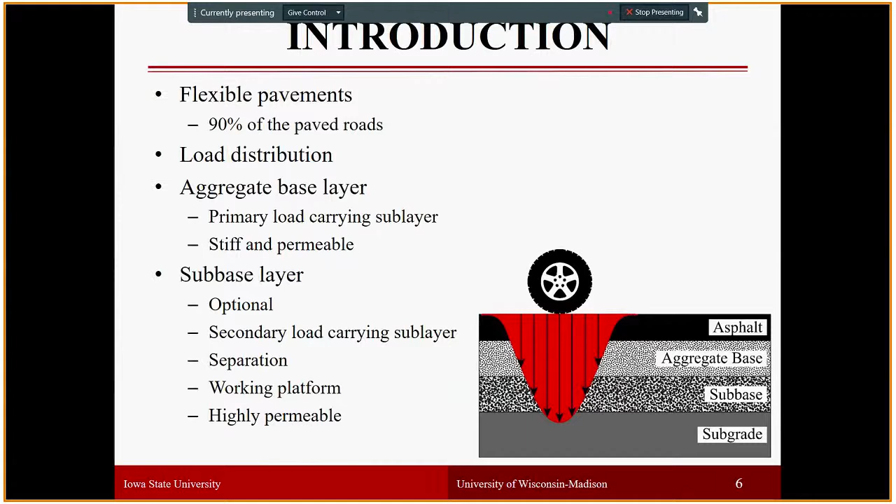One issue with previous sub-base layers was permeability, and it is well known that moisture presence in pavement foundation systems does not help the stiffness of the upper layers. So it is very important that the sub-base layers have good drainability.

For instance, based on the USGS 2018 report, 1.33 billion tons of virgin aggregates are being used, and more than three-quarters of this for roadway construction. So the demand increased, and the presence of low quality aggregates causes an increase in the price of conventional virgin aggregates to be used.

So states are looking for alternative materials. For instance, some of these alternative materials are recycled concrete aggregates, recycled asphalt pavements, but now large stone sub-bases are another alternative material to be used in these bases, most likely sub-base materials.

Large stones have potential to be used for the sub-base layer, especially for their drainability, drainage capacity, and using less intense crushing operations, improving sustainability. The energy consumption decreases significantly, making the material more available and lower in cost.

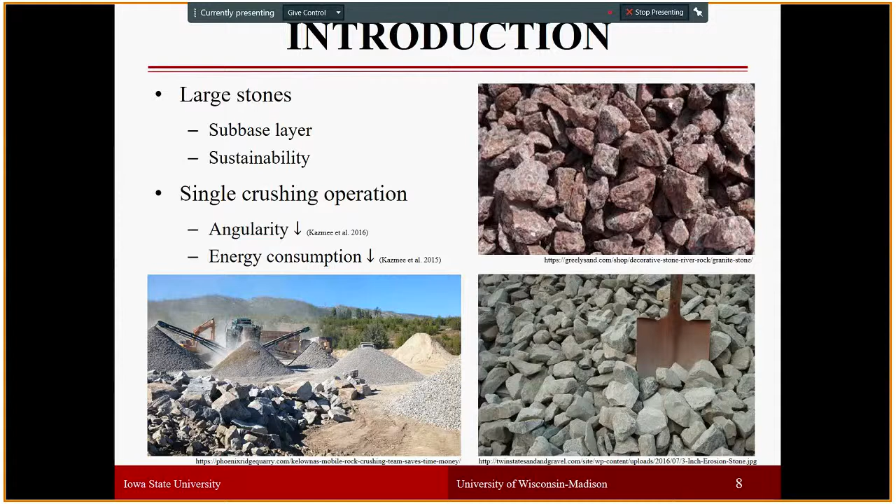One thing is its angularity is decreasing because you don't get the intense crushing process that you have in regular virgin aggregate production or recycled concrete aggregate production. But the lower angularity may contribute to higher permeability on these materials too, which is an advantage.

One of the main drawbacks of large stone sub-base is that there is not enough data that can be followed for design and construction. There are some states mentioning these large stones, and we mention it significantly in our Task 1 literature review report, which is on the MnROAD test data. I have 5 slides at the end of my presentation; if anybody is interested, we can go over them after the presentation is finished.

One limitation is laboratory equipment. One of the first things in any design, DOTs or contractors look for gradation specs and determine the gradation. But for large stone sub-bases this is not as easy as for regular virgin aggregates, because there are large sizes more than 2 or 3 inches in diameter, and there are no sieve shakers in a conventional standard laboratory to do that. Part of this limitation, we are going to try to implement an image analysis technique that can be used very quickly.

Another issue is inconsistent field data and fluctuation of data. One study conducted by Dr. Tutumluer, Kazmee et al. 2016, saw some inconsistency with field data because of large voids and the handling of the material due to its different size. Mobilization of particles is high with these materials; once you put them, compaction is not easy, and we will show pictures. They have large voids, and after you put these large stone sub-bases and the base layer and asphalt layer under traffic, they start reorienting themselves and keep moving.

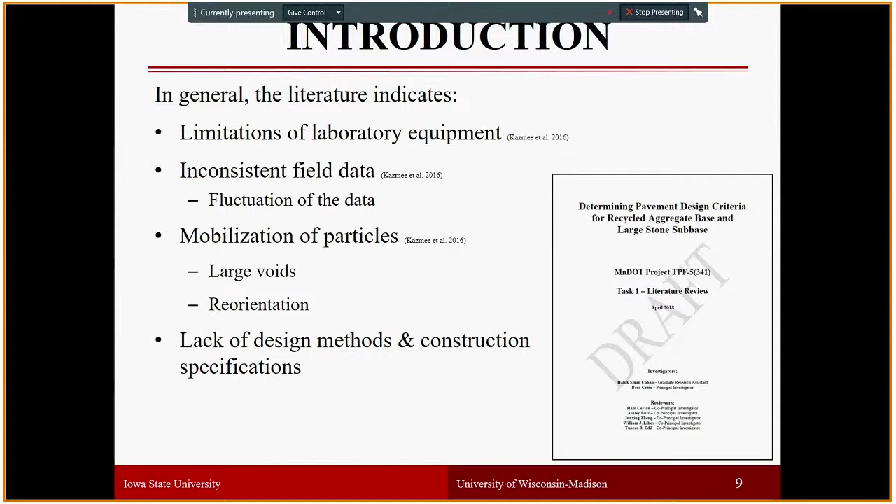As part of our project and ongoing process, the first goal is to determine the field performance, then determine its index properties from the laboratory, especially particle size distribution, sphericity, angularity, and surface texture of these materials, which are very important. The third goal is to try to come up with a design spec for this particular large stone sub-base.

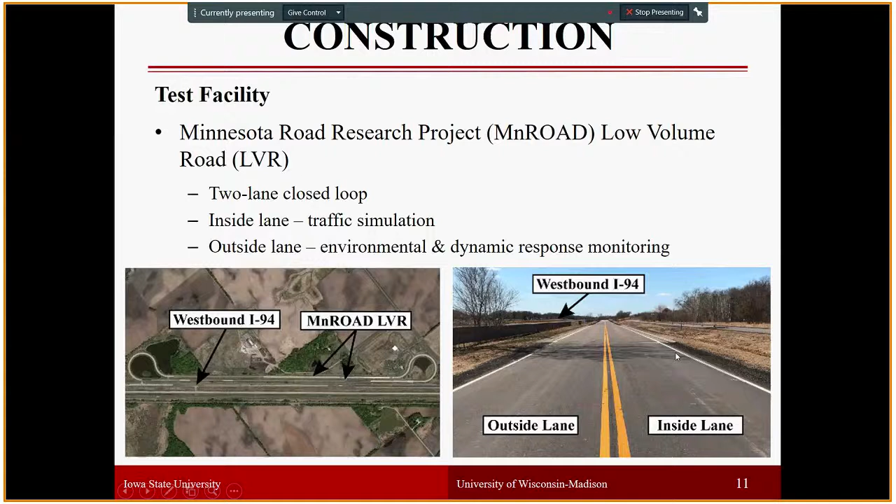We have 6 different test sections, 7 different test sections built with large stone subbases in MnROAD, a low volume road test section. It's a 2-lane closed loop, and we are having readings from the outside lane and inside lane of these test sections. Currently the test sections we have, like I said, are 7 different test cells built with large stone subbases.

The first 2 test cells here are built on a clay loam subgrade, and the large stone subbase is built with 18 inches thick material.

Then we have 4 cells built with 9 inches thick large stone subbases, with a triaxial geogrid, triaxial geogrid with geotextile, another section built with large stone between the subbase and clay loam using biaxial geogrid and geotextile, and another just with biaxial geogrid. There is one cell, 728, that only has 9-inch large stone subbase over clay loam.

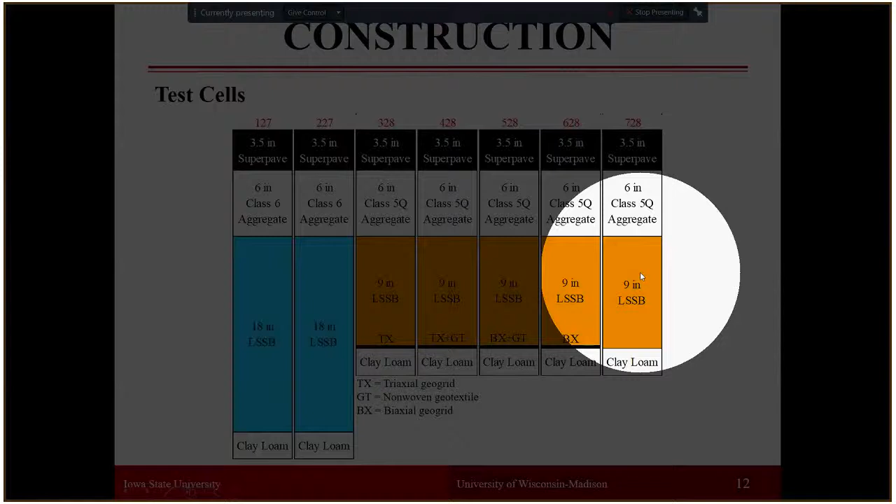The reason this test section was left as-is, based on the construction report, is that there are too many utilities in this part, so it was not easy to reconstruct this test field.

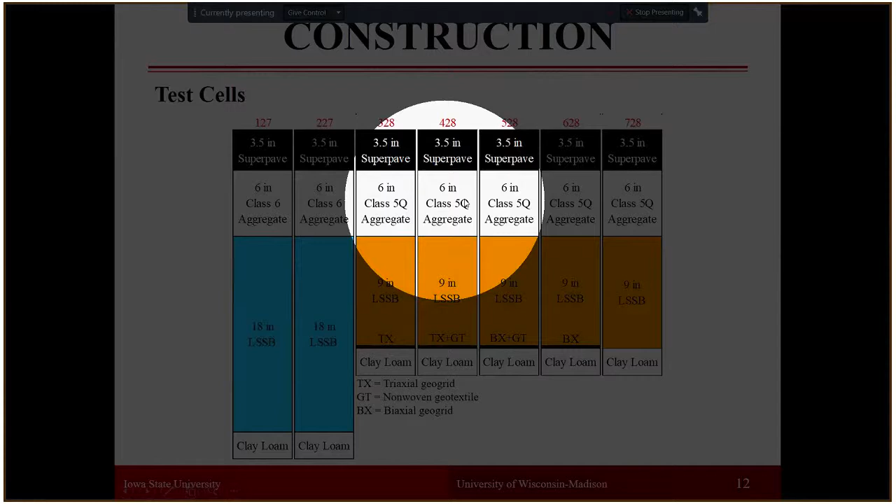One thing that is different is that the test sections with 18-inch thick large stone subbases have a class 6 aggregate on top as a base layer, while the other large stone subbases use class 5Q aggregate material as the base layer. All of them have 3.5 inches thick asphalt layers on top.

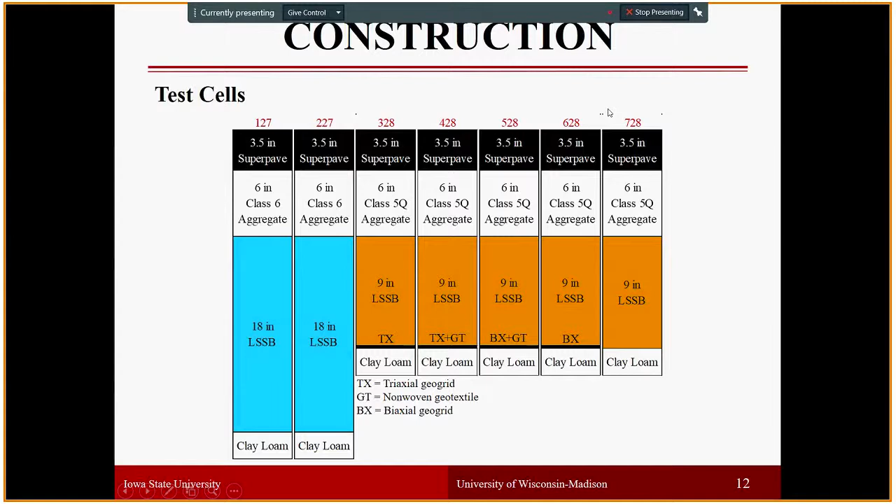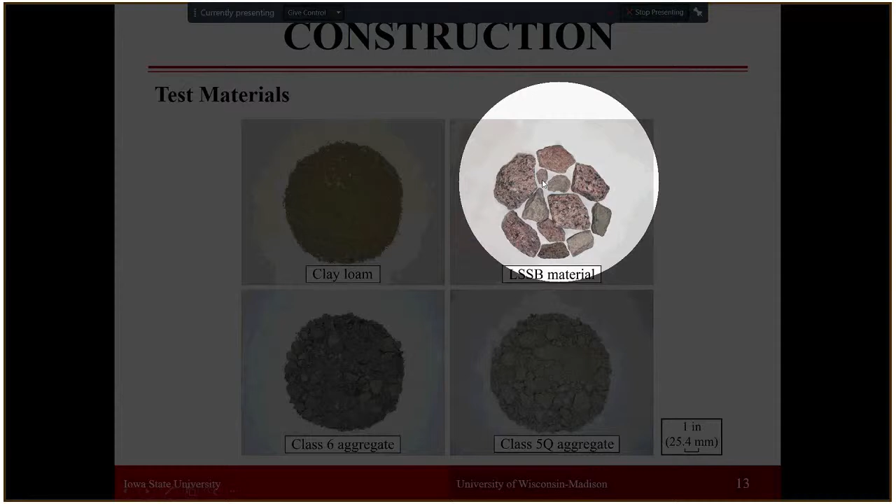Today's talk will mainly focus on the large stone subbase aggregates that we use. As you can see here, we put a scale for 1 inch, and the large stone subbase aggregates are predominantly much larger than 2 to 3 inches in size overall.

During construction of the 18-inch large stone subbase layers, and actually all large stone subbase layers, there was non-traditional subgrade preparation. The subgrade was weakened in the beginning to a value where the DCP index should be between 2.5 and 3.5 inches per blow. It was loosened and watered to prepare the subgrade.

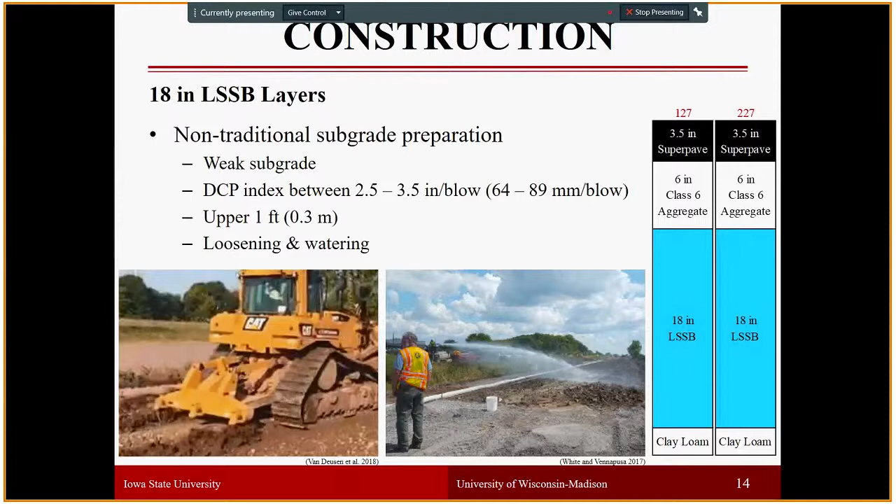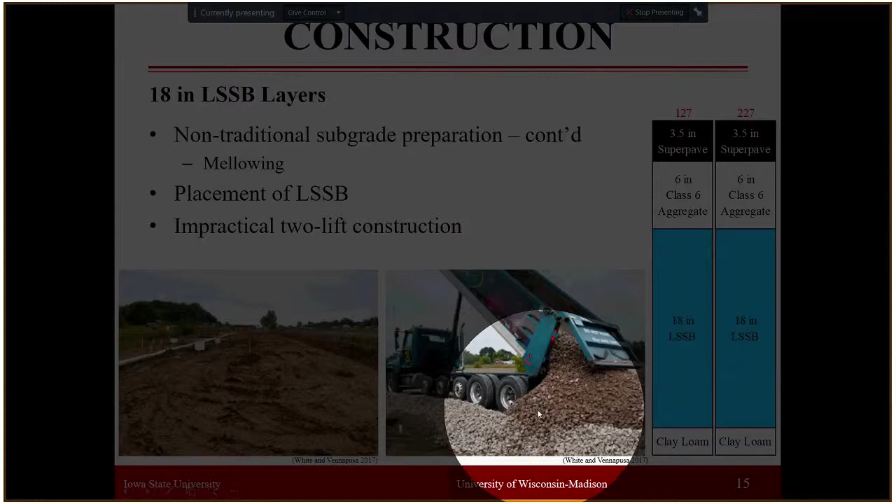Here again, the idea was—and this is why we have 2 identical test sections—one of these test sections was originally thought to be built in 2 layers instead of one thick 18-inch large stone subbase layer. But due to construction issues, constructability of these layers in 2 lifts was not really easy or feasible, so we ended up with 2 identical test sections, one next to the other.

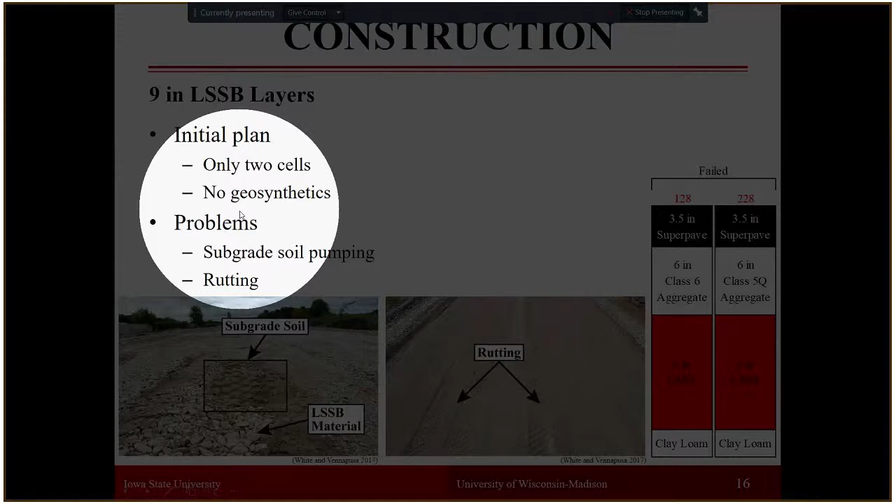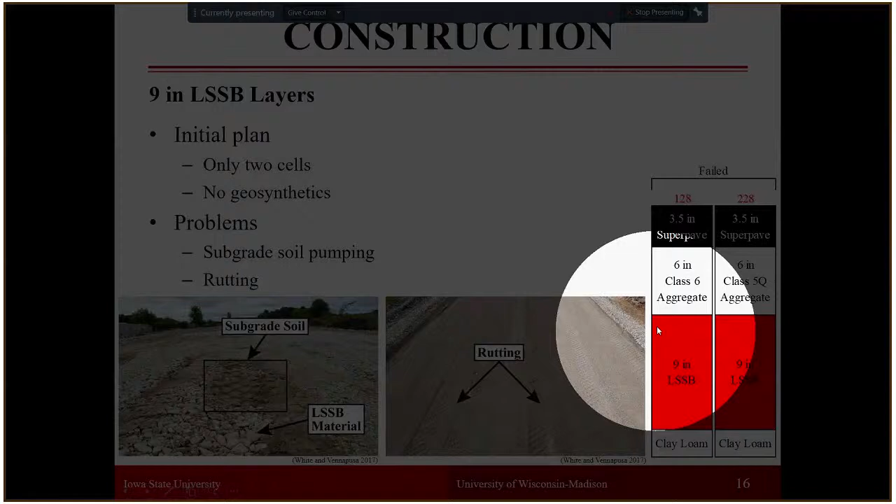During construction of the 9-inch thick large stone subbase materials, the initial plan was to only have 2 cells with no geosynthetics, so we could compare the 9-inch large stone subbase layers with cells built using different aggregate materials, and also compare these 9-inch thick materials directly with the 18-inch thick large stone subbase materials. However, there were significant problems with the subgrade.

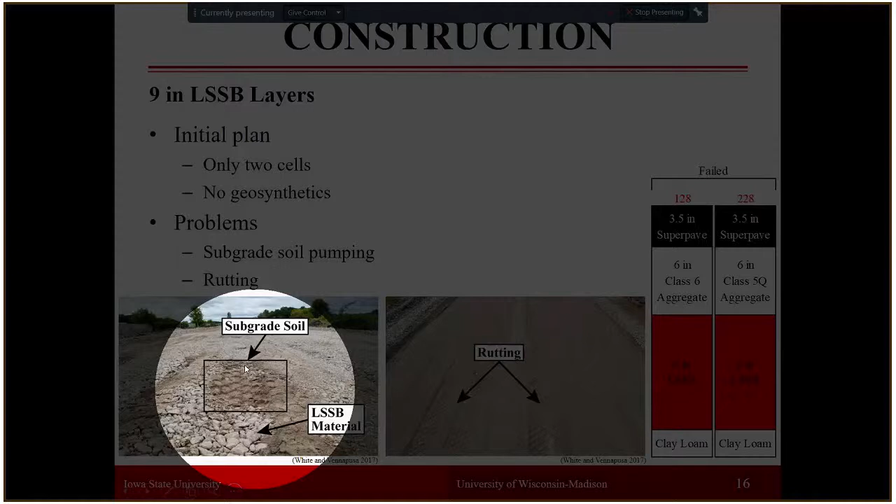One of the problems was subgrade soil pumping. Once the large stone subbase was put on the subgrade, the subgrade soil started being pumped, moving toward gaps and voids through the large stone subbase to the surface. After putting the base layer on top, significant rutting failures happened during construction with the equipment.

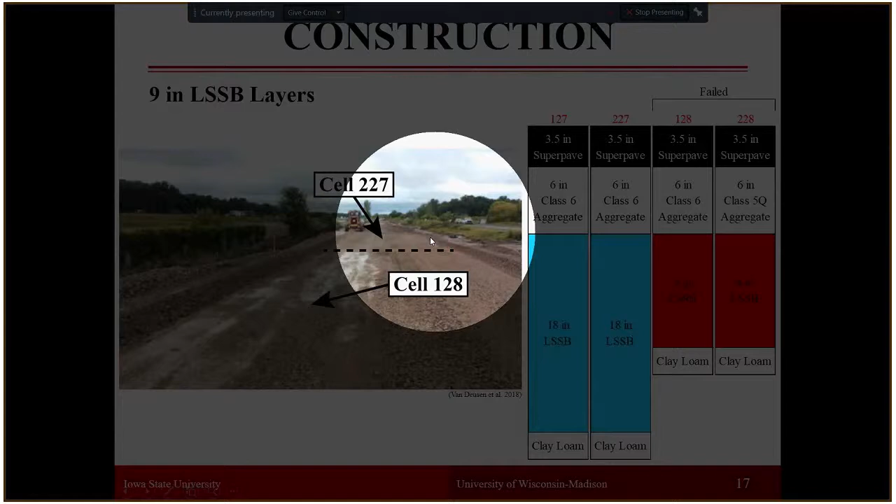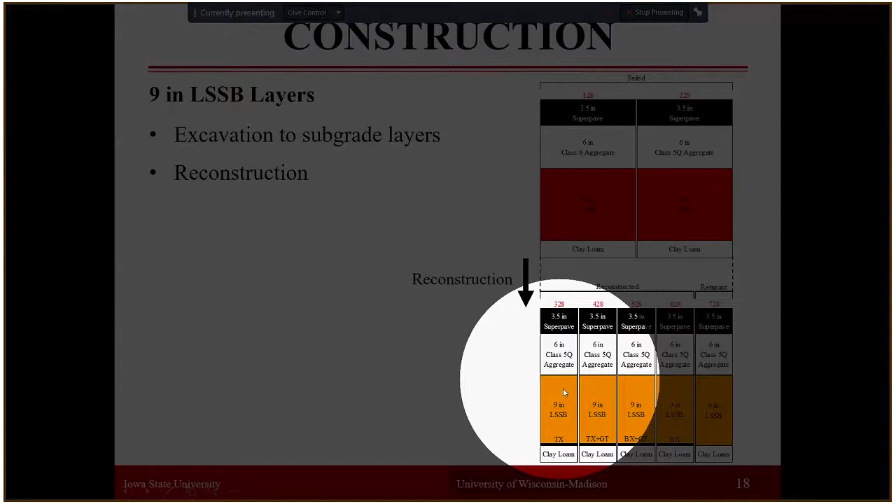So all sections were rebuilt, and this time geosynthetics were placed between the subgrade and the large stone subbase layers for these 4 test sections that have 9-inch thick large stone subbases.

To repeat, the reconstructed test section has 9-inch large stone subbases. The first cell had triaxial geogrid, then a combination of triaxial geogrid and geotextile, biaxial geogrid and geotextile, and biaxial geogrid alone, all placed between the 9-inch thick large stone subbase and the clay loam.

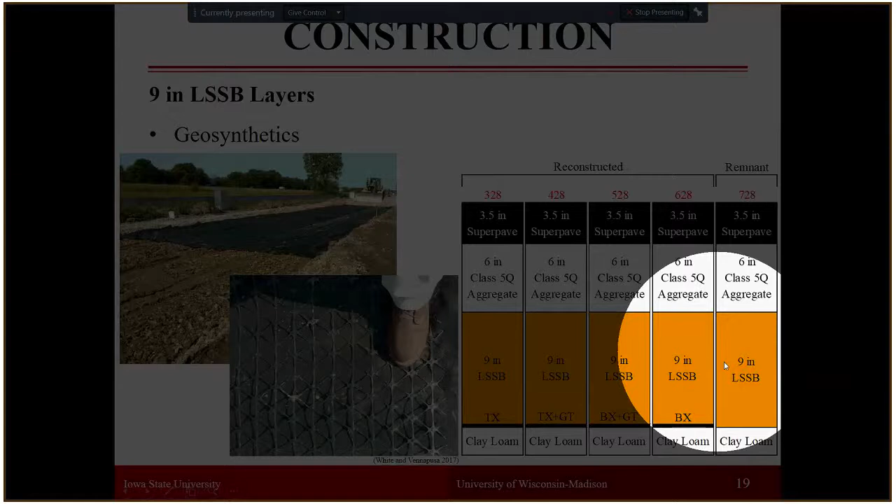We have this last test section, which we decided to use as a control section with no geosynthetics.

In terms of field testing, we have conducted dynamic cone penetrometer tests, MnROAD-conducted DCP, lightweight deflectometer tests, intelligent compaction tests, and falling weight deflectometer tests.

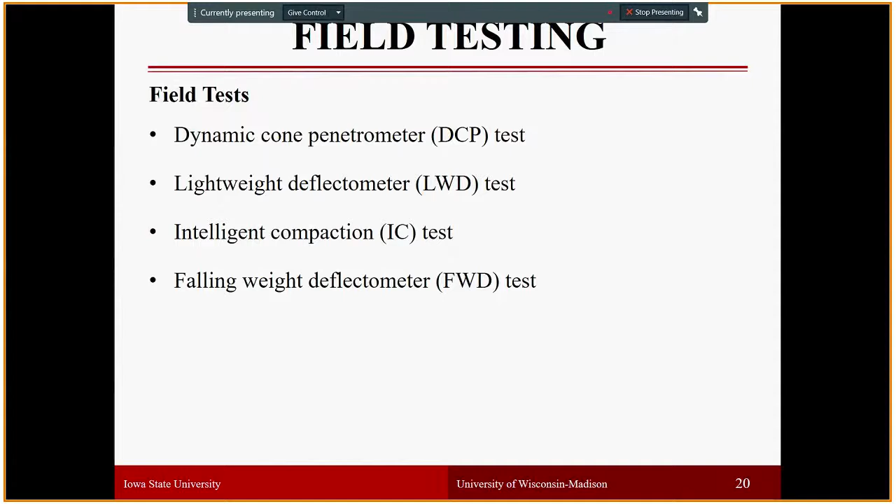In terms of the dynamic cone penetrometer test, on the y-axis we have the DCP index in inches per blow, and on the other axis we have SI units. The blue solid symbols represent the DCP of the subgrade layers. The idea when weakening and loosening the subgrade soil was to make sure these 3 inches per blow DCP index were satisfied before the test sections were built.

The red line and red boxes show the DCP of the base layer after it is built, and as you can see, it has a stronger, lower DCP index than the subgrade layers. From here we can observe that, in terms of strength, the thicker large stone subbase test sections have a lower DCP index, indicating they are slightly stronger than the other test sections built with 9-inch large stone subbase with geosynthetics.

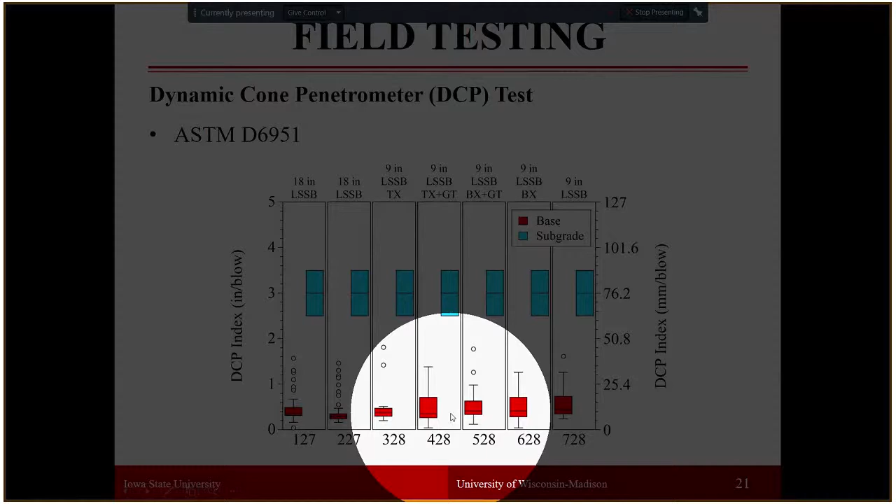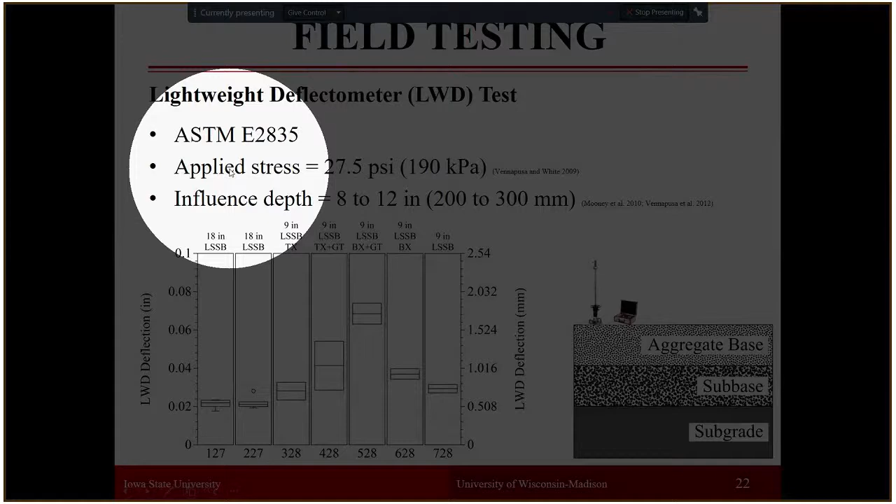For the lightweight deflectometer test, we followed ASTM E2835, and the applied stress was 190 kilopascal. It should be kept in mind that the influence depth of the LWD is 8 to 12 inches. These tests are conducted on the aggregate base layer.

What the LWD does is give the composite modulus of the entire pavement foundation system. Looking at the entire system, the test sections built with 18-inch large stone subbase had 0.02 inches of deflection, while the test sections built with 9-inch large stone subbase with geosynthetics had higher deflections. As a result, they ended up having lower composite modulus values.

One thing we wanted to point out is that the subgrade conditions for these 9-inch thick large stone subbases, even though they were the same subgrade, the conditions did not seem to be the same as the subgrade under the 18-inch large stone subbases. So we have sensor data installed in this test section and we're collecting that data. We're not there yet, but we will also look into the moisture values of this subgrade and other characteristics later on to check what is going on with the subgrade itself.

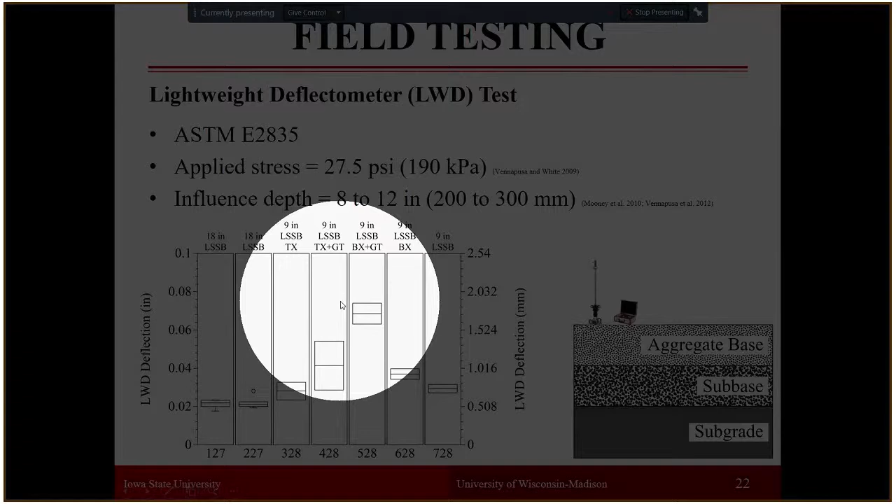However, even though we don't see the contribution of the geosynthetics per the LWD test results, during construction, based on observations, the geosynthetics definitely helped, and rutting did not occur after test sections built with geosynthetics on the base layer. So it contributes, but the range of the LWD test is not really enough to quantify the contribution of the geotextiles on the system. This was one of the field limitations in measuring the geosynthetics' contribution in the field, and I have a few more slides describing this in more detail.

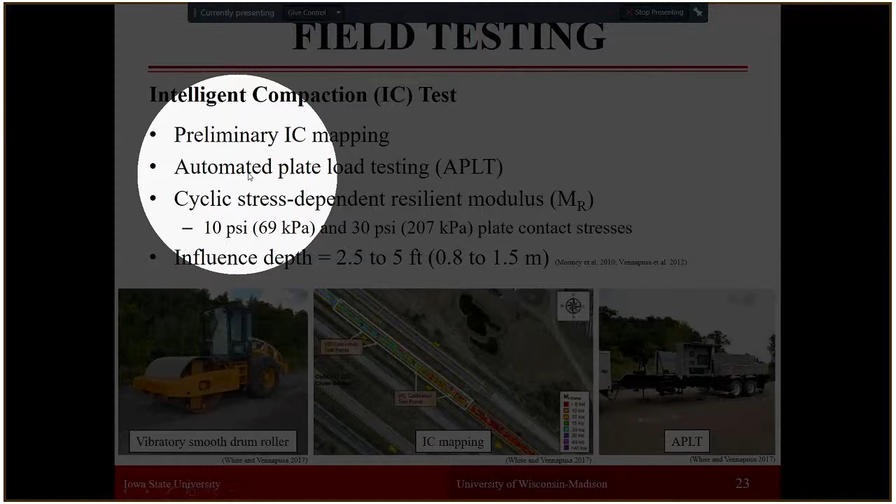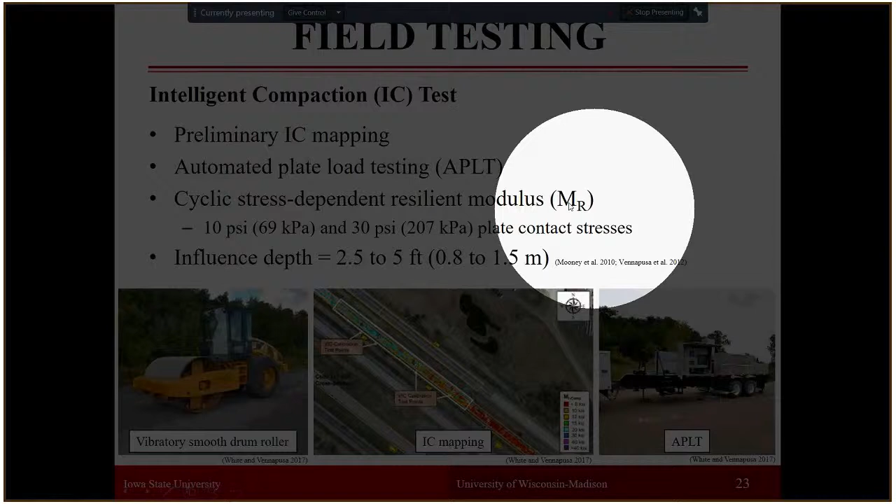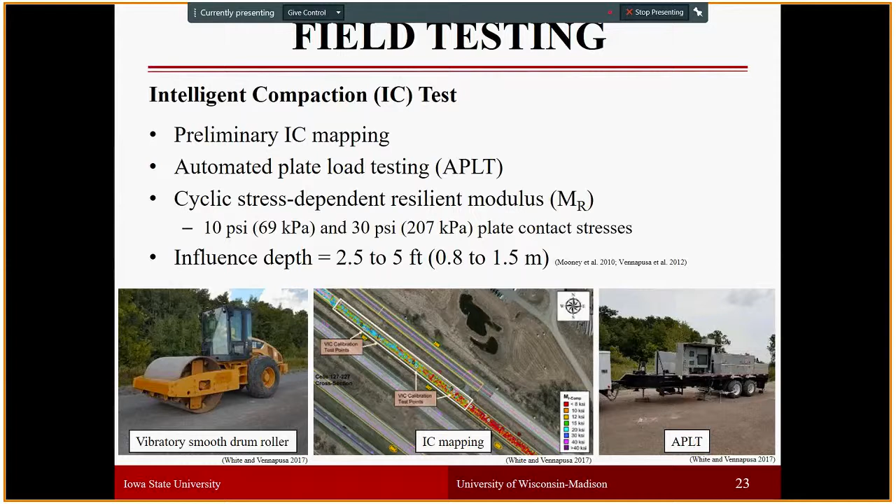Intelligent compaction tests were also conducted, and here is the preliminary IC mapping conducted by Ingios Geotechnics. Automated plate load testing was also conducted under different stress-dependent conditions to determine the resilient modulus from the field tests. These tests were conducted at two different plate contact stresses. The influence depth of the APLT test is higher than the LWD for composite layer analysis, so we hope these results may provide better information about these large stone subbases.

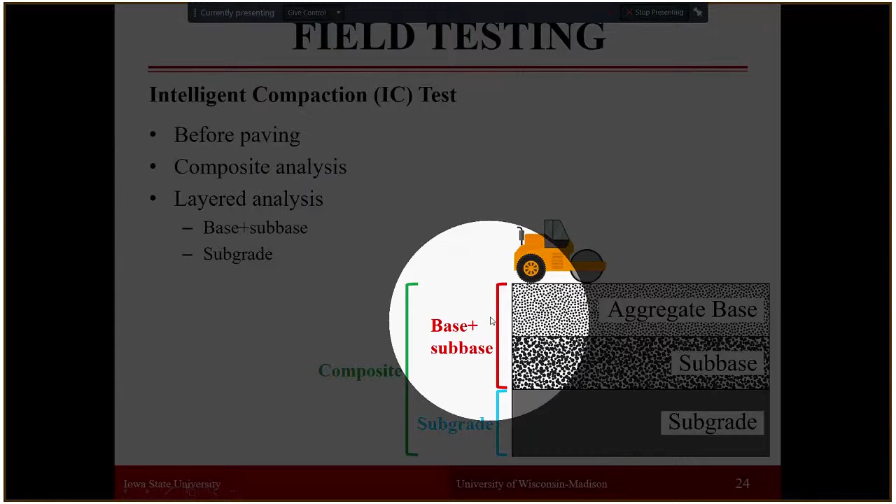All intelligent compaction tests were conducted before paving. We conducted both composite analysis, looking into the resilient modulus values of the entire pavement system, as well as only layered systems of base and subbase, and only the subgrade layer analysis from these tests.

Then we look at the base-subbase stiffness from the large stone subbases. The 18-inch thickness test sections have relatively higher resilient modulus values than the rest of the test sections built with geosynthetics. However, another thing we see, exactly what Kazmi et al. 2016 and the University of Illinois, Dr. Tutumluer, experienced, is a fluctuation in the performance of these large stone subbase test sections.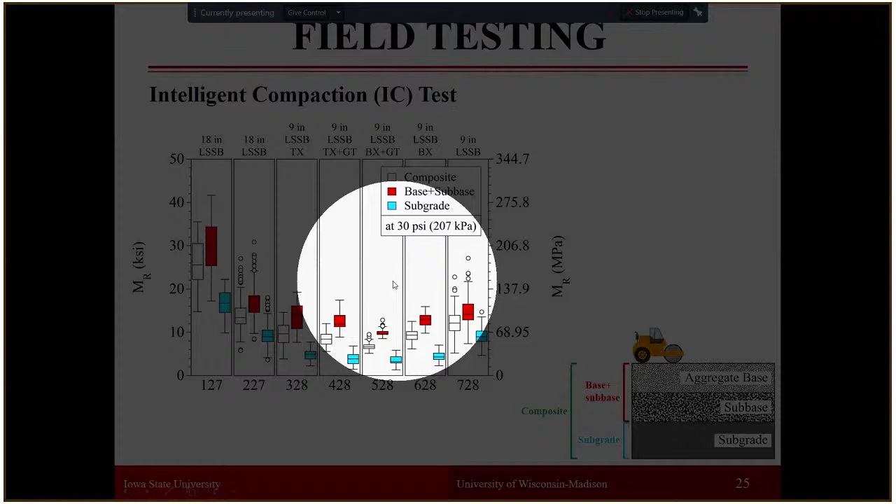In terms of geosynthetics, the triaxial geotextile and triaxial geogrid built 9-inch large stone subbases seem to have slightly higher stiffness and resilient modulus values than the ones built with biaxial geotextile and biaxial geogrid, indicating that triaxial geogrids seem to have a slight advantage over the biaxial geogrid plus geotextile test system.

We also had MnROAD conduct falling weight deflectometer tests, and this is a picture and schematic diagram of the FWD test equipment.

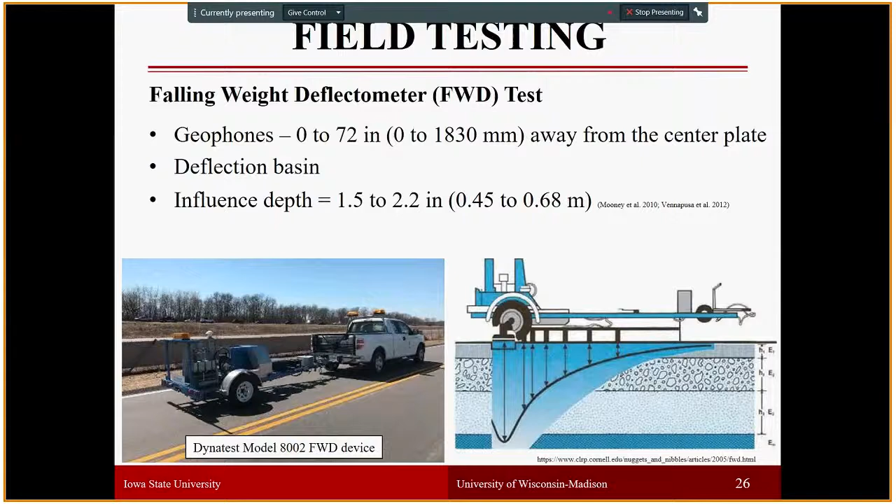Again, we used the influence depth of FWDs at this range, which is on almost the top surface of the base layer of these test sections. We look at the deflection basin using all 9 geophones to do layered analysis to predict the stiffness of subgrade, subbase, and base layers. We also look into the composite analysis of the composite elastic modulus of the entire test section using the FWD test.

But in this case, we only use the sensors and measurements at the center, at the load plate.

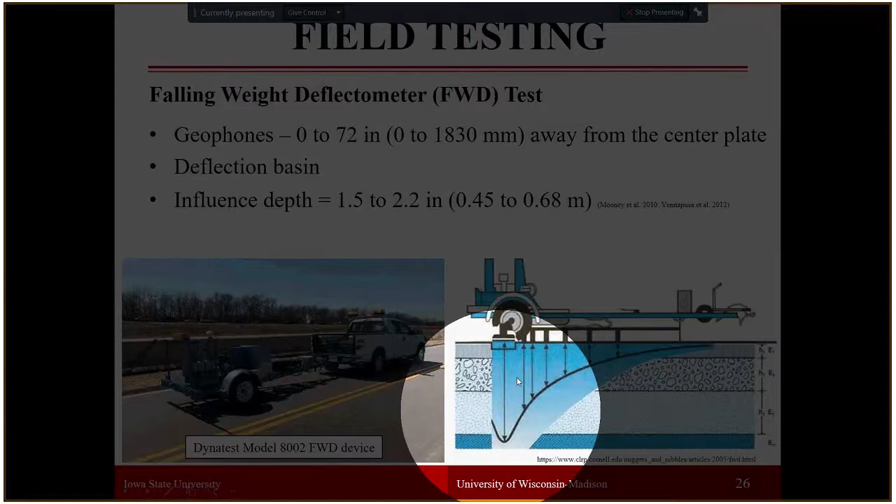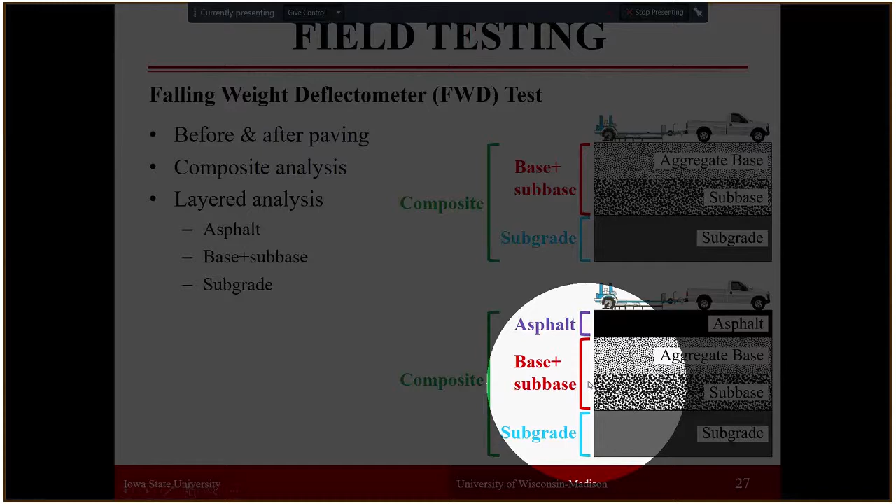Again, we did the FWD analysis before and after paving, with base, subbase, and subgrade layered analysis, and composite analysis. We also analyzed the FWD right after paving and did the asphalt layered analysis, determining base, subbase, and subgrade, plus composite analysis again.

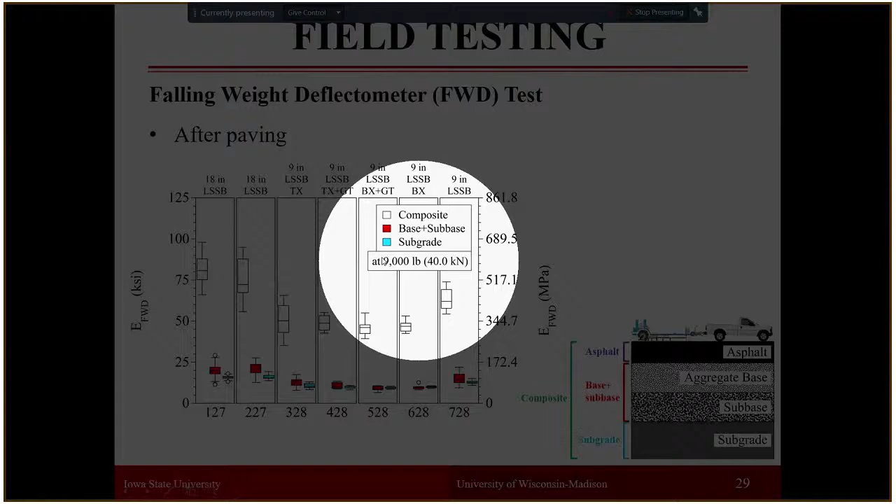But the FWD results are consistent in trend with the intelligent compaction and APLT test results, indicating that our analysis is valid. After paving, we did the same analysis, and again subgrade stiffnesses are lower, as expected, than the base, subbase, and asphalt materials themselves.

And from the composite analysis itself, again the trend is the same after paving: the 18-inch large stone subbase had higher elastic modulus than those built with 9-inch large stone subbase with geosynthetics.

With the composite analysis, we calculated the elastic modulus of the entire system as one whole. Again, 18-inch large stone subbases performed better, and the 9-inch large stone subbase test sections built with geosynthetics had lower elastic modulus compared to the 18-inch large stone subbases. It seems triaxial geogrids have, on average, slightly higher elastic modulus.

This higher elastic modulus occurs when it is paved, showing that triaxial geogrids may have some advantages over other geosynthetic systems based on these results.

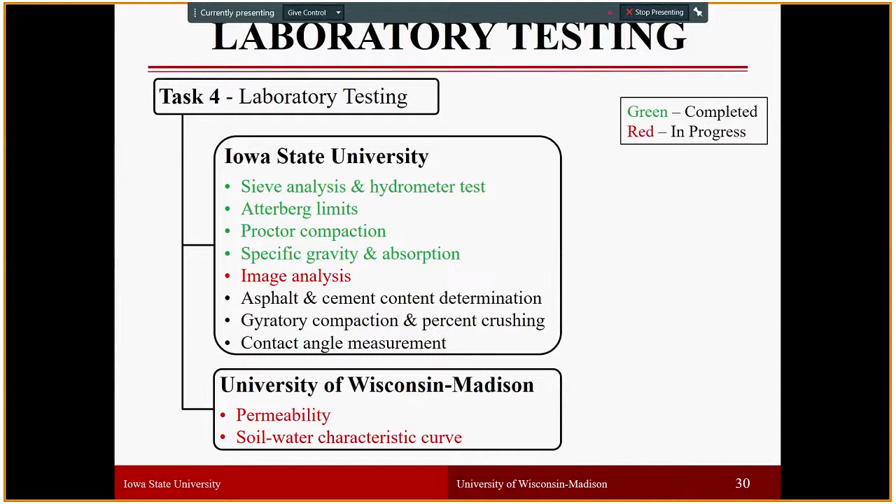Currently we are working on laboratory testing of these materials. We have sieve analysis for the base layers used over these large stone subbases: class 6 aggregates and class 5Q aggregates. We also did it for the clay loam material, and as you can see, the subgrade has very high fines content.

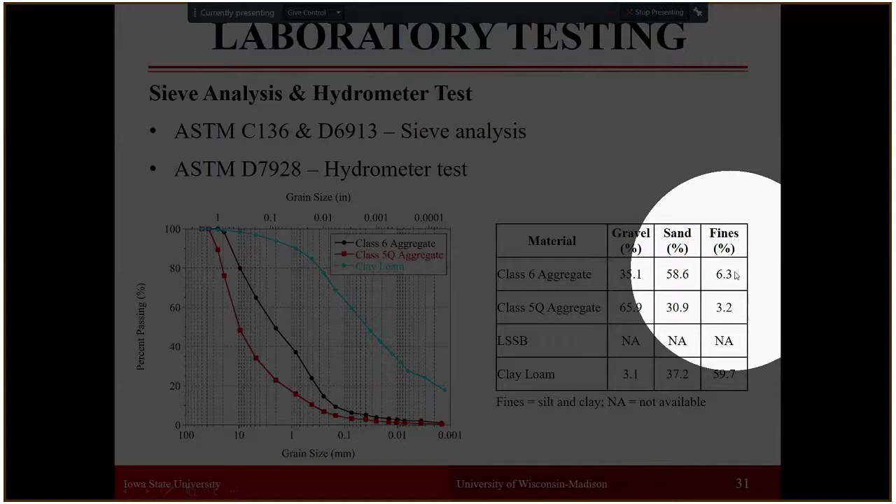On the other hand, the fines content of the class 6 aggregate and class 5Q aggregates are 6.3 and 3.2 percent respectively. For large stone subbase, we are doing extensive imaging analysis, and hopefully by end of April we will have the gradation of large stone subbases.

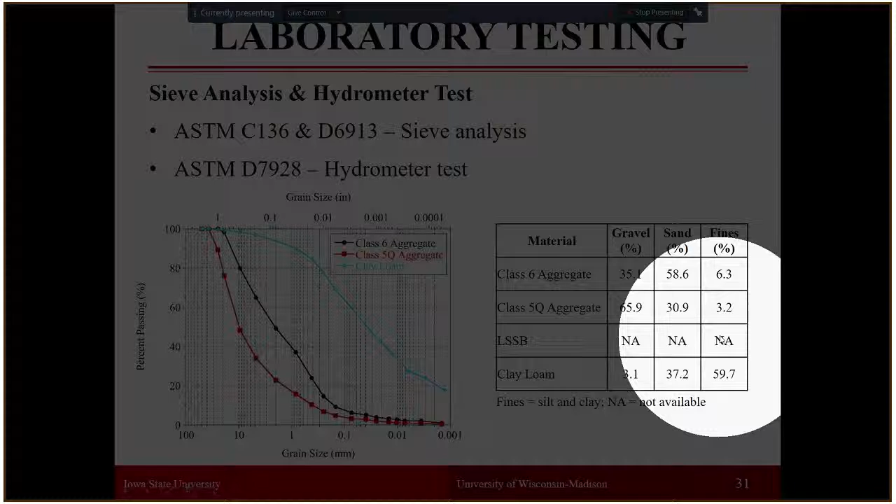Like I mentioned in the first introduction slide, large stone subbase gradation determination is a challenge, a limitation. Hopefully with this tool we're developing, that limitation will be overcome.

Some Atterberg limits tests were conducted for these materials. The liquid limit of the class 6 aggregate was 27.4, but no plastic limit was determined. The class 6 and class 5 base materials were A1A materials, while class 6 was poorly graded sand with silt and gravel.

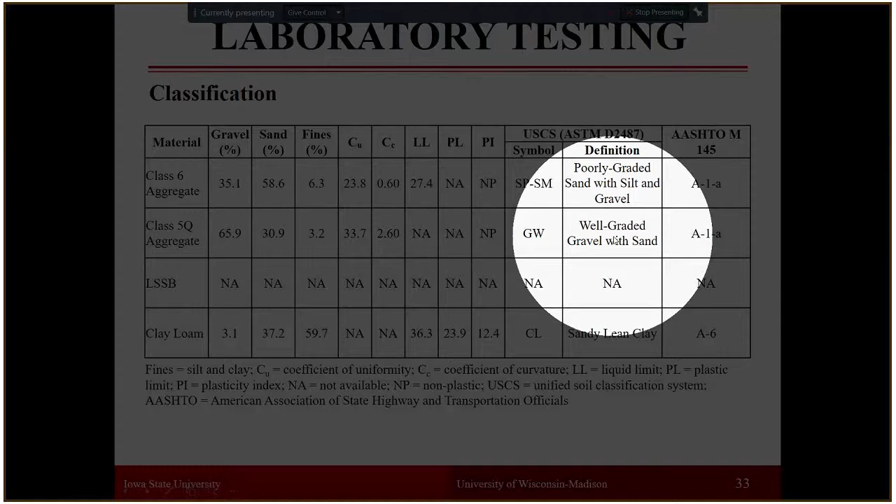Class 5Q was well-graded gravel with sand. A1A, based on AASHTO classification, makes it very good, high-quality aggregate material to be used in such analysis and design.

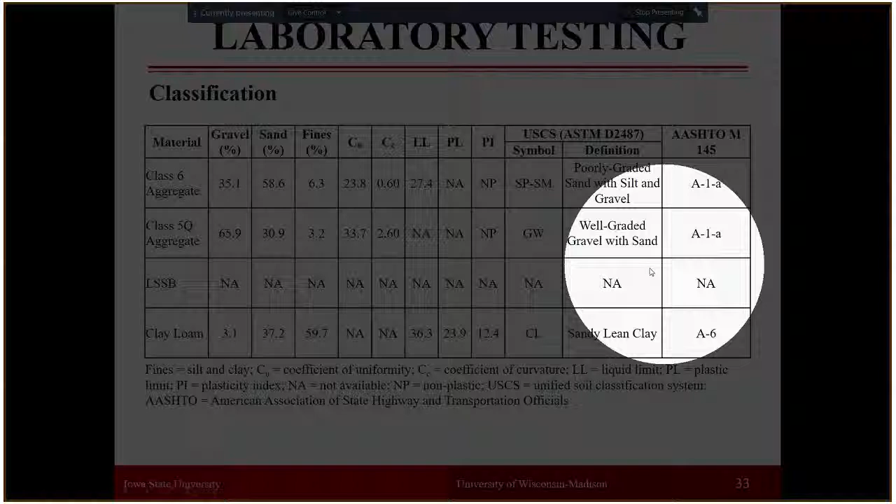The clay soil under these large stone subbases was low plasticity clay, classified as sandy lean clay, an A6 subgrade material. Again, data is not available yet for large stone subbase; we are working on this.

Of course, we likely won't have any Atterberg limits or plasticity data for these materials. Hopefully, by end of April, we will have gravel, sand, fines, and coefficient values, along with the classification of these large stone subbases.

Specific gravity and absorption of these materials were also tested; for the large stone subbase, we can only look at the coarse specific gravity and absorption. In terms of specific gravity, the large stone subbase specific gravity is higher than that of the class 6 and class 5 aggregates, indicating it's a heavier material.

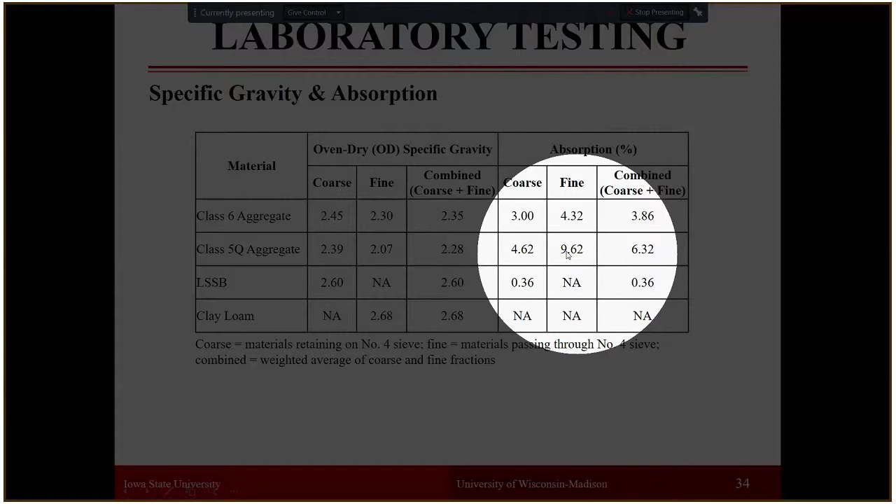In terms of absorption, the absorption characteristics of these large stone subbases are much lower than those of the regular conventional class 6 and class 5Q aggregate materials, as you can see in this table.

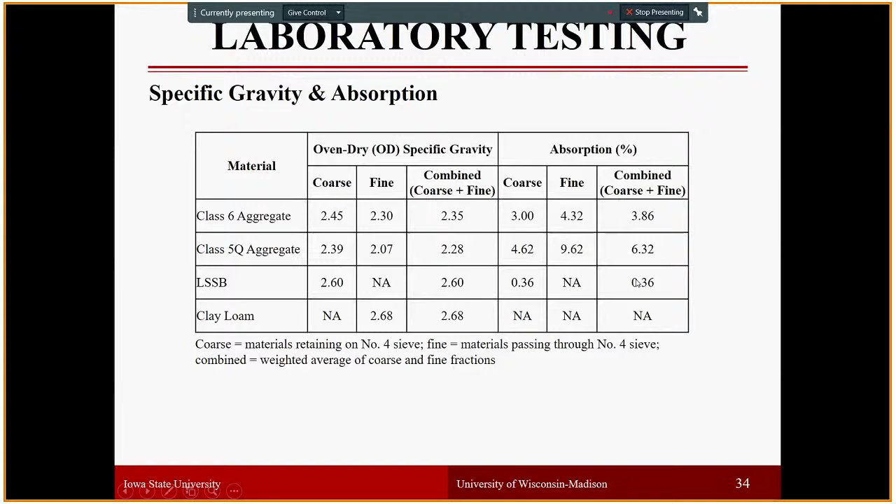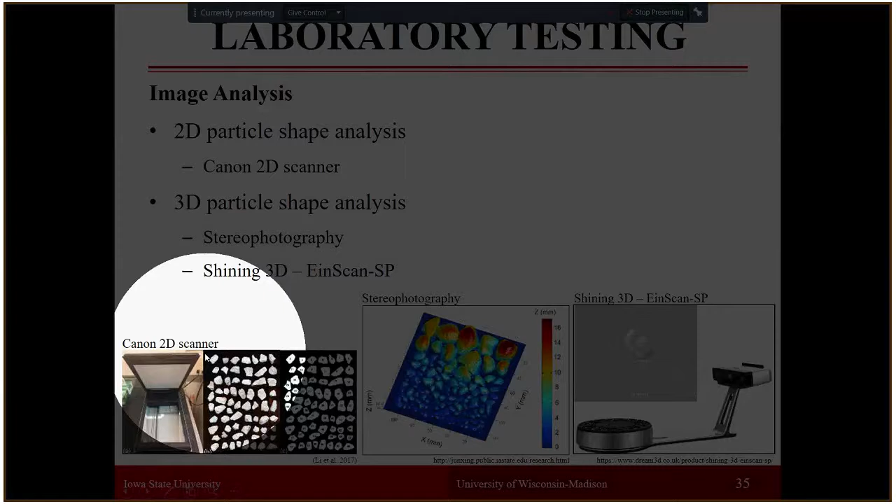Currently we are working on image analysis, doing a 2D scanner, which many Iowa DOTs have access to, and we're doing a 3D particle shape analysis. We're trying to come up with a stereophotography tool - by taking just 2D pictures, you can predict the 3D dimensions of these materials. We will validate this stereophotography analysis with our 3D scanner scanned parameters.

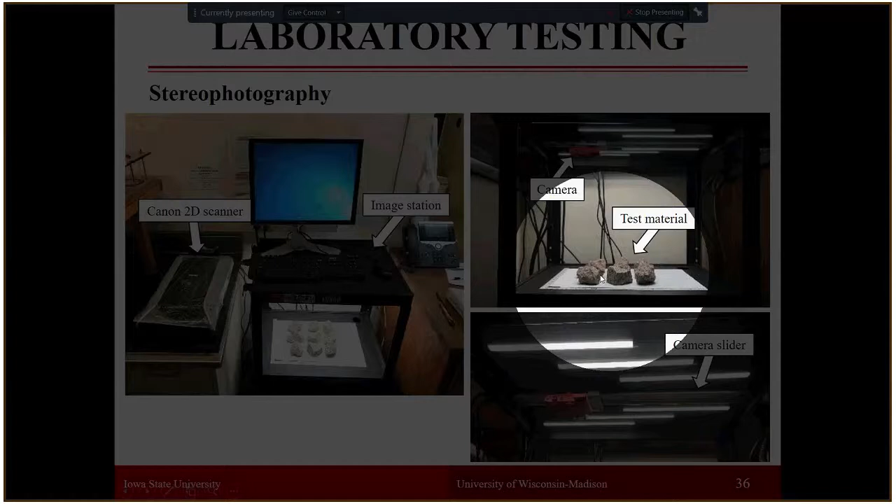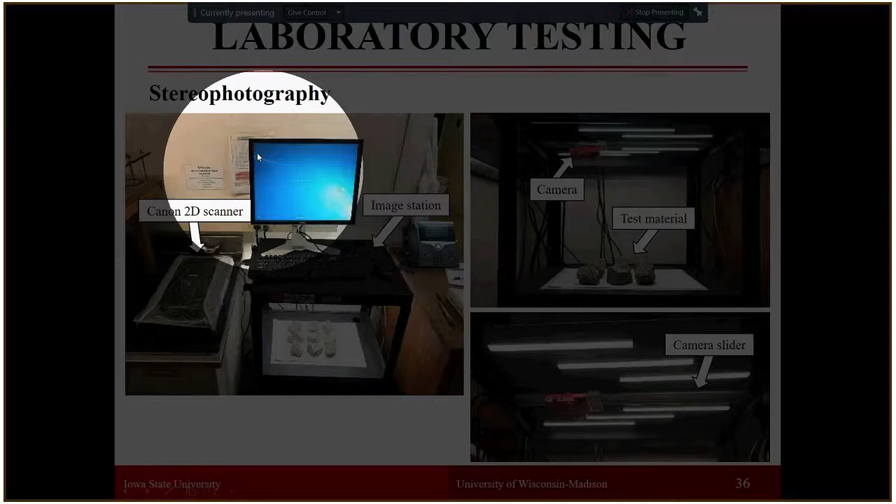This is the stereophotography station that we developed and built. We have a camera on top here, and we put the large stone aggregate subbase materials down here, and our camera slides. For stereophotography analysis, you need to take the same picture of the same material in at least two different positions so you can create that 3D model. In our analysis, we take pictures at the left edge, the right edge, and the center, so we get a more reliable stereophotography analysis.

To validate this stereophotography, we take representative samples and do 3D scanning through the EinScan scanner. Then we validate our stereophotography tool, and use that by just taking a picture of the material to determine the aggregate sizes.

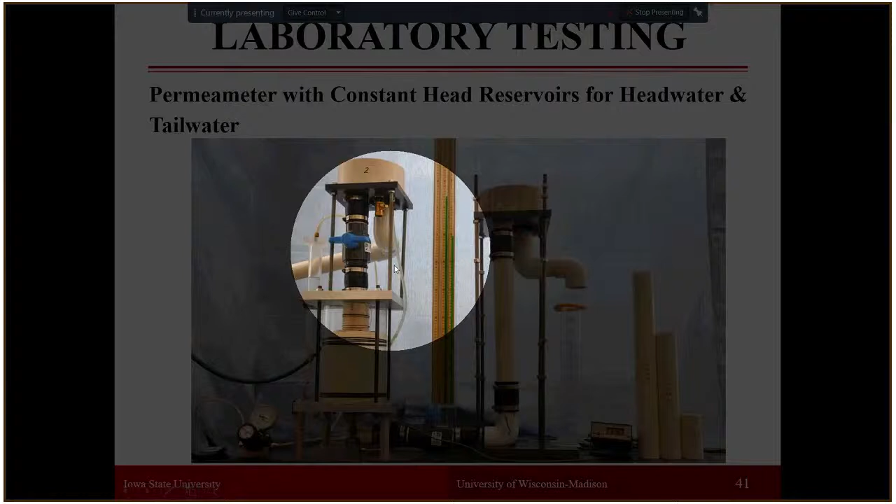This is a typical permeameter with constant head reservoirs for head water and tail water, used for aggregate base materials. This is not applicable for limestone subbases, and Wisconsin will conduct the permeability test on the limestone subbases after we are done with our image analysis and all that.

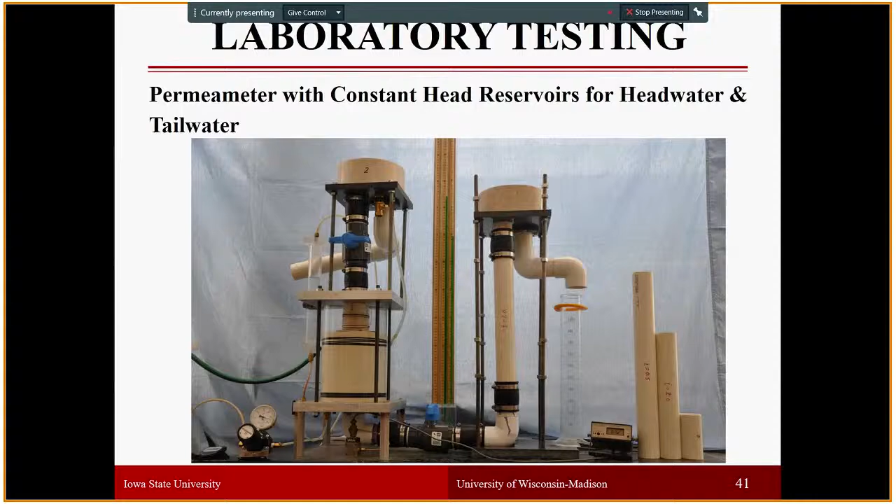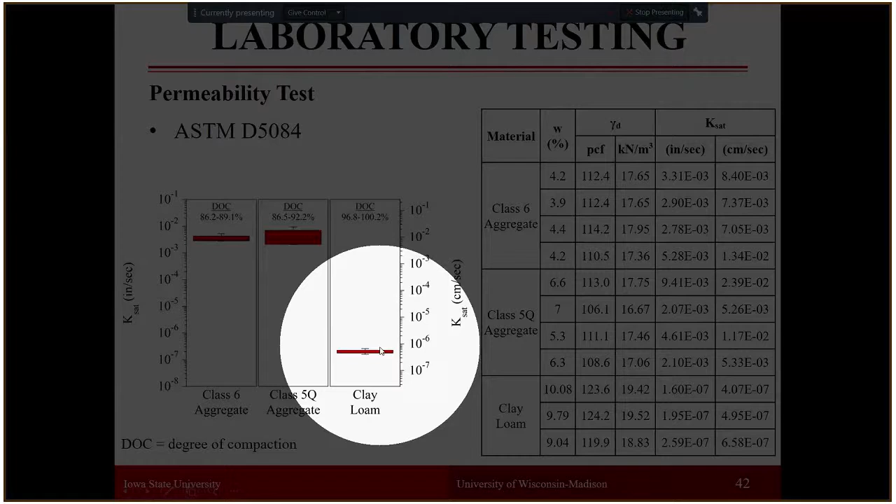These results show the hydraulic conductivity conducted on the base layers, Class 6 and Class 5Q materials, and the clay loam material at certain density and moisture content values. On average, the hydraulic conductivity permeability of the Class 6 and Class 5Q aggregate bases is between 10 to the minus 2 and 10 to the minus 3 centimeters per second, while clay loam hydraulic conductivity is close to or lower than 10 to the minus 6 centimeters per second, which is expected.

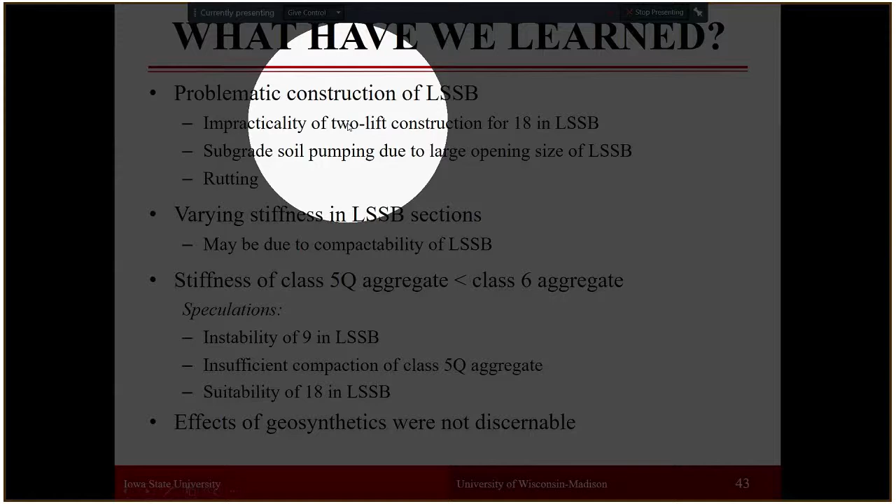So what we have learned so far from our research on the limestone subbases: during construction, there was impracticality of two-lift construction for 18-inch limestone subbases - it was just not feasible. Subgrade soil pumping due to the large opening size of limestone subbases was observed, and once you put the base layer on, rutting occurred. These were the problems.

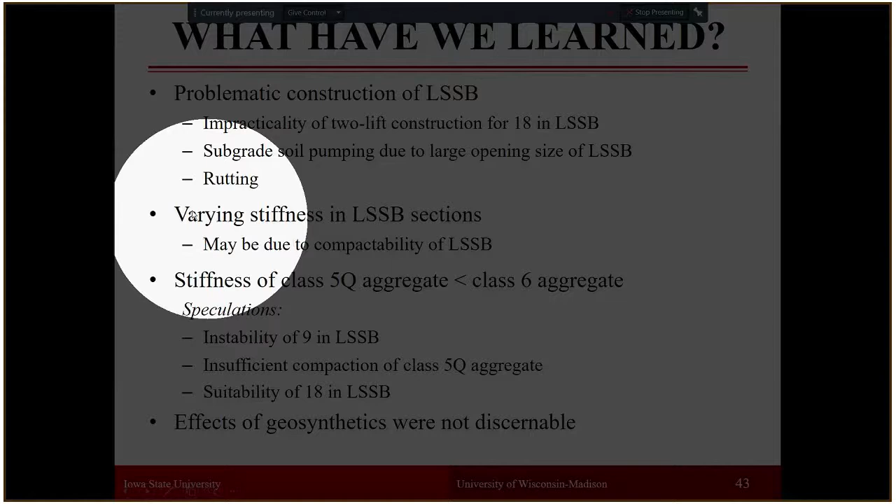For instance, with the 9-inch thick limestone subbases, these two issues were overcome by putting in geosynthetics. However, one challenge with this is that quantifying the contribution of the geosynthetics in terms of stiffness and strength gain was not feasible.

The reason for this is that current test methodologies - LWD, or APLT automated plate load test, or falling weight deflectometer test - the load put on the test sections is not really enough for geosynthetics to start showing their contribution. So different test methodologies, maybe heavyweight deflectometer test methodology that is usually used for airport pavements, may be used to quantify the impacts of geosynthetics on the stiffness and strength of these test sections.

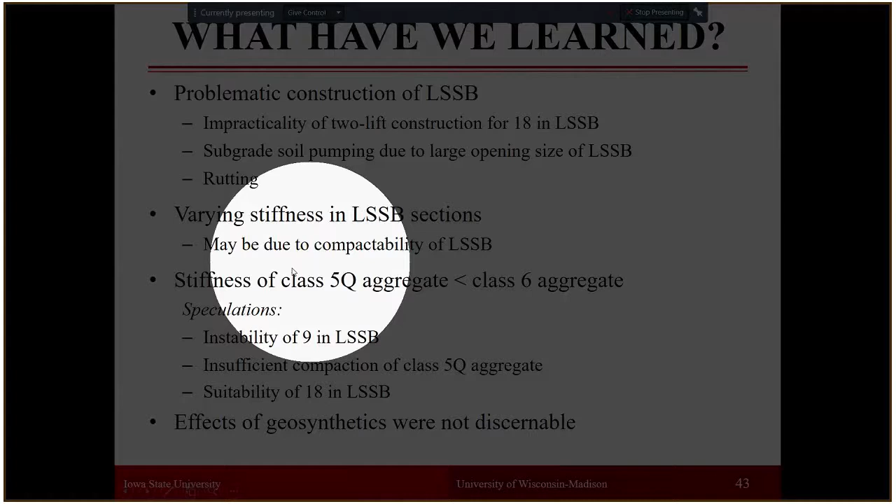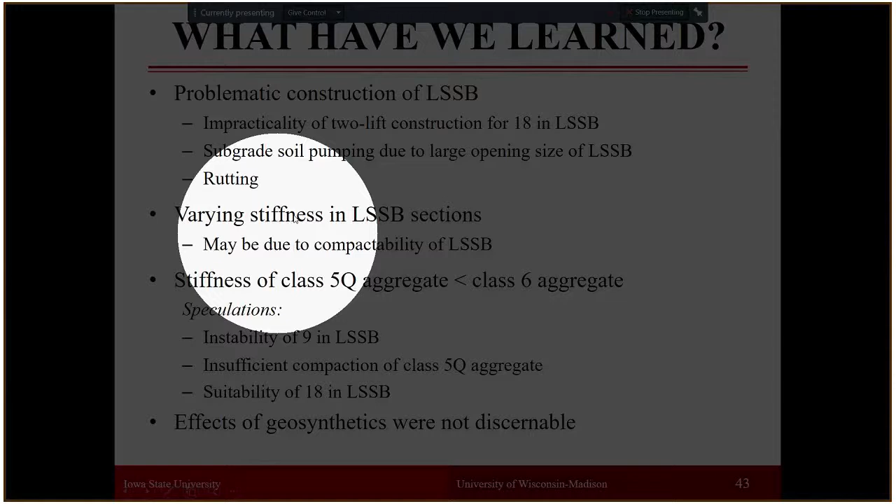Especially with 18-inch thick limestone subbases, we see significant variation in stiffness, even within each test cell itself. This could be related to compactability being a problem with limestone subbases.

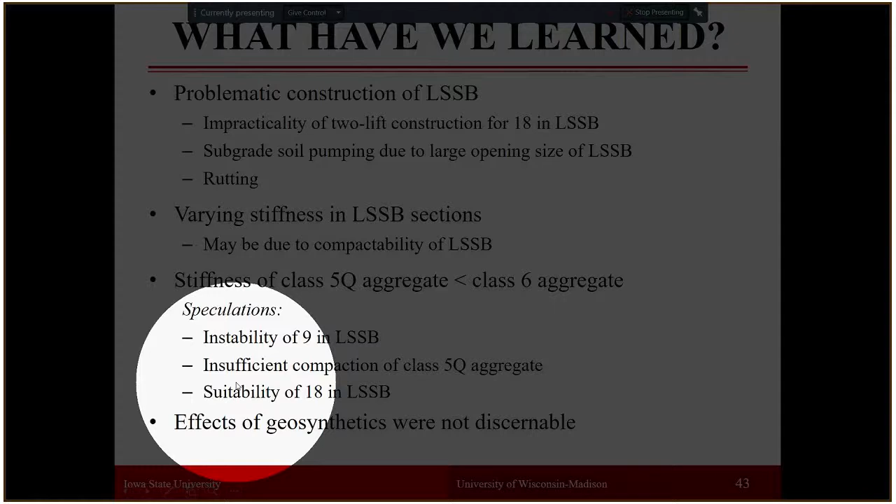The stiffness of the class 5 test sections built with class 5Q aggregate and class 6 aggregates were lower overall than the class 6 aggregates. These are speculations currently, with the information we have. Hopefully we're collecting more data with MnROAD, and we'll have more information about this later on.

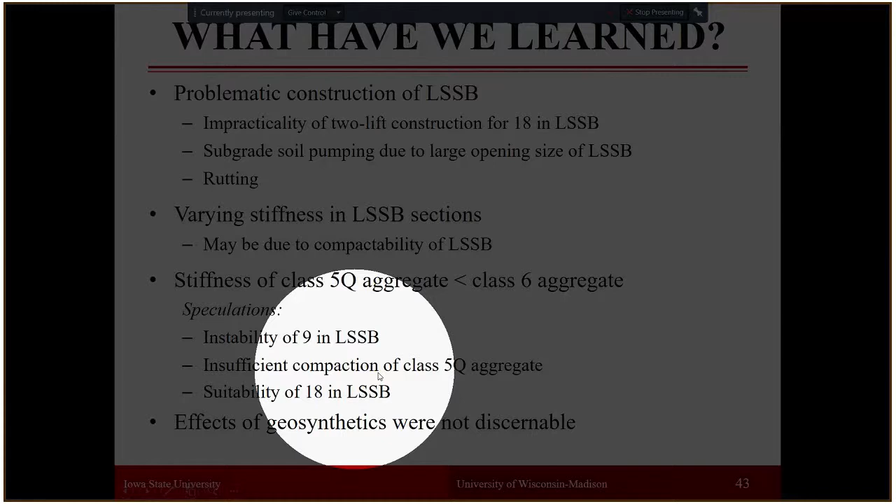Instability of the 9-inch large-stone subbases, as we observed with the 18-inch large-stone subbases. Insufficient compaction of class 5Q aggregate may contribute to the overall composite analysis. We have some data showing we're working on the analysis of that, so it may be related to that.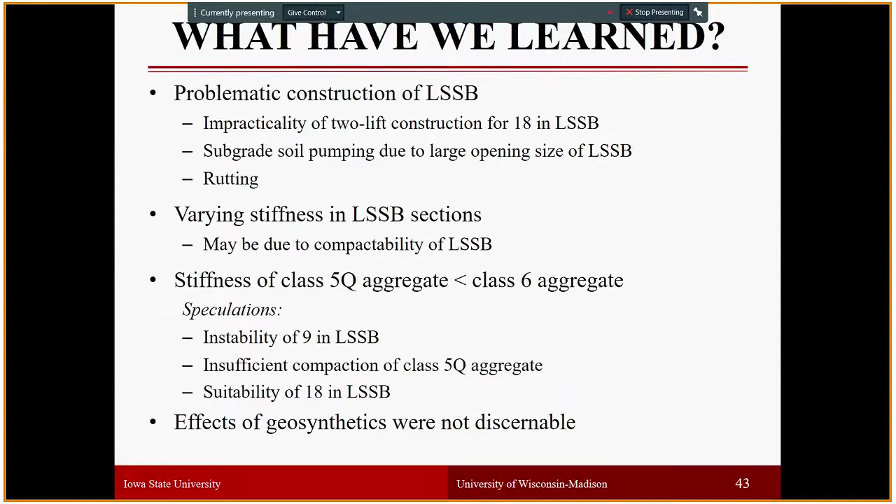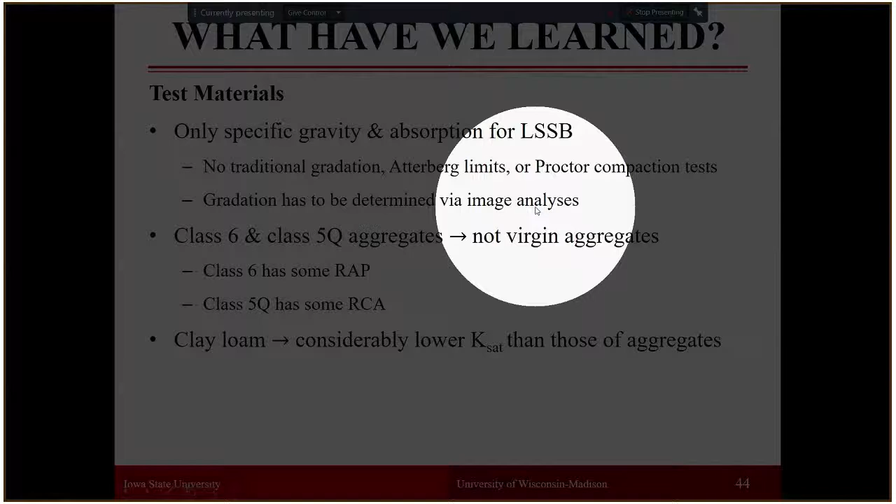Now, what we have learned: currently, specific gravity and absorption for large-stone subbases can be done, but you can't do traditional gradation. You don't need to do Atterberg limits because it's non-plastic, and Proctor compaction tests won't work for large-stone subbases. So gradation has to be determined via image analysis, and we're working on that tool, which will be available.

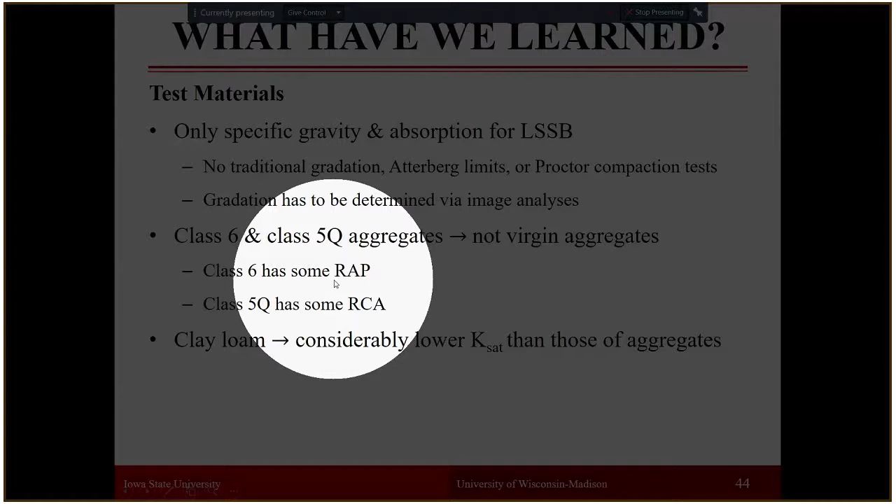One thing we learned, which is expected by local DOTs too: class 6 and class 5Q aggregates are classified based on gradation, and these materials are allowed to contain some recycled materials. Class 6 has some RAP visually that we can see, and we're working on the asphalt content to determine how much is in class 6. Class 5Q base aggregate has some RCA—we can really smell the cement out of this. So these are not really virgin aggregates; they have some recycled materials in them.

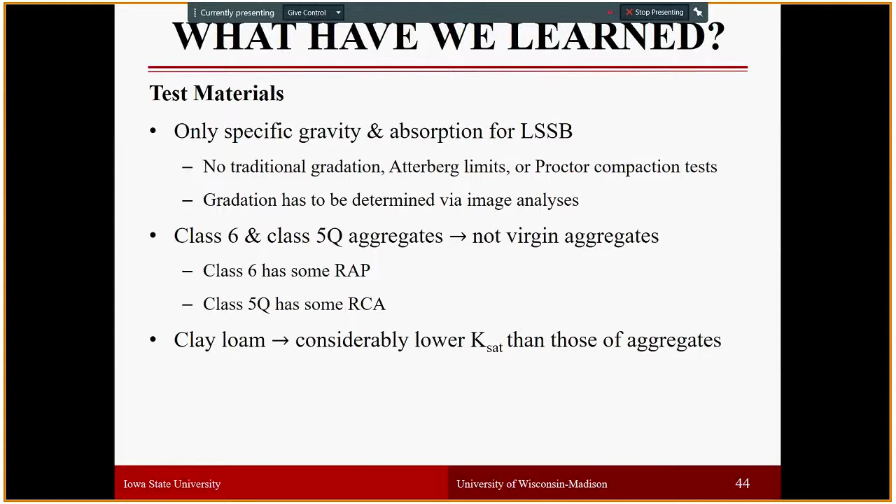And we learned, as expected, that subgrade material has much lower hydraulic conductivity than the aggregates, and we hope to get more data on permeability for the large-stone subbase materials.

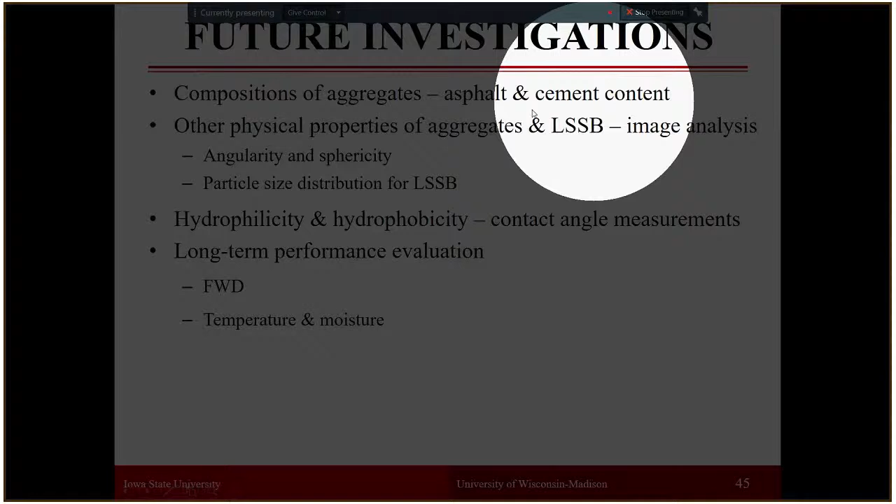For future work, we're currently working on the asphalt and cement content of the base layers used in this study. In addition to gradation, the size of the large-stone subbases and other aggregates, we're going to look into the angularity and sphericity of these materials, and the hydrophilicity and hydrophobicity of the RAP and RCA—we want to learn how hydrophobic our RAP materials are compared to the RCA materials and other conventional aggregates used.

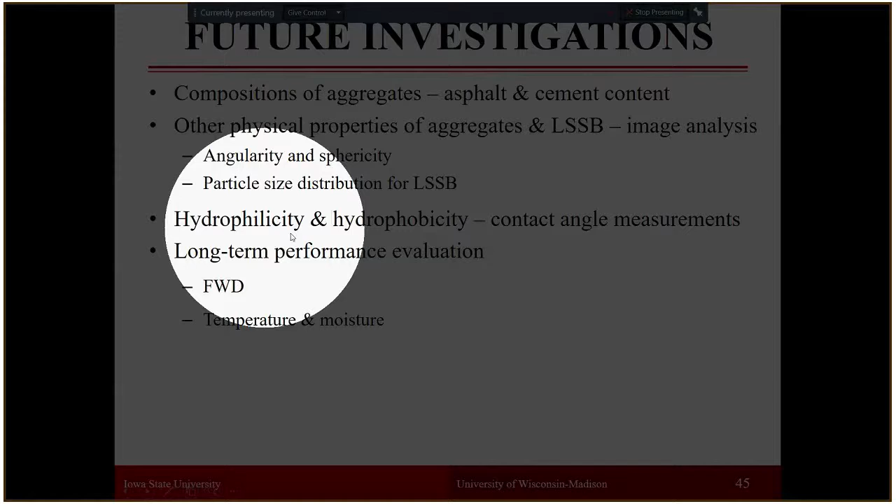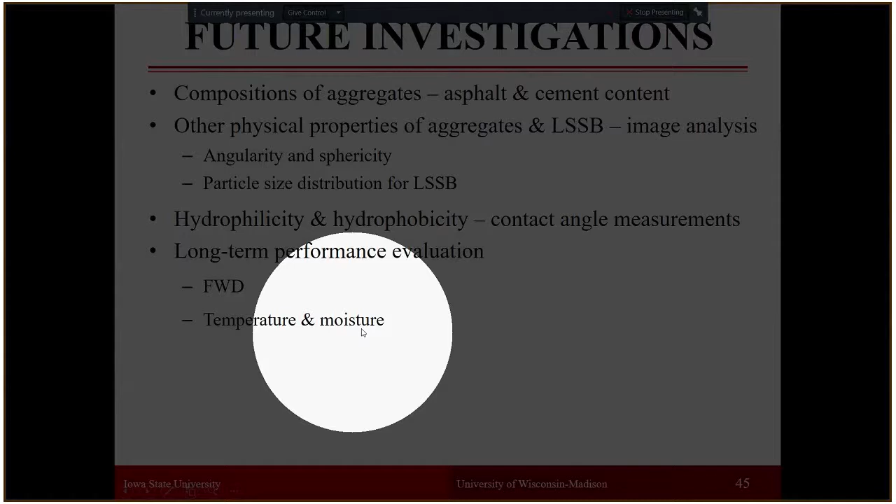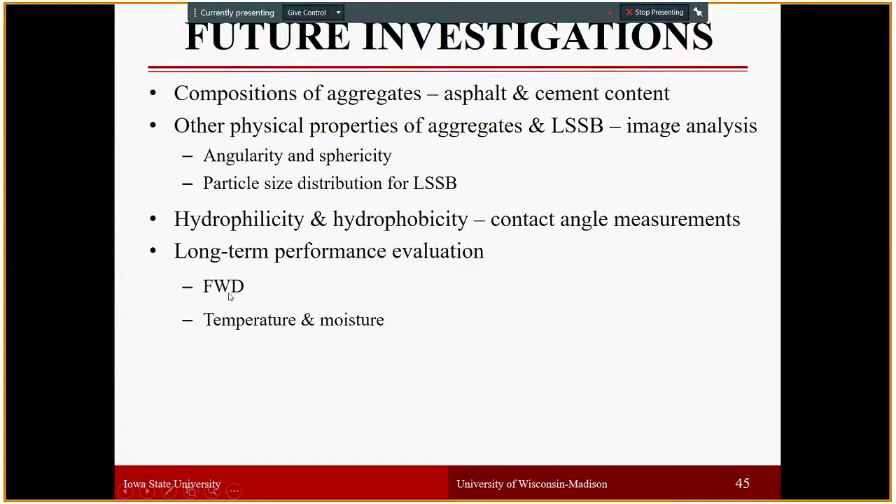We continue to collect data from MnROAD on elastic modulus values, temperature, and moisture data. This temperature and moisture data will be very useful to tie into the elastic modulus values collected from the continuous FWD results. So we can see if the test sections built with geosynthetics have higher moisture conditions, which could contribute to lower stiffness and strength values.

Having said that, this is the end of the presentation. Happy to answer any questions. Bill, Tuncer, I don't know if you're there—anything that I missed, please feel free to chip in. Well, thank you very much.

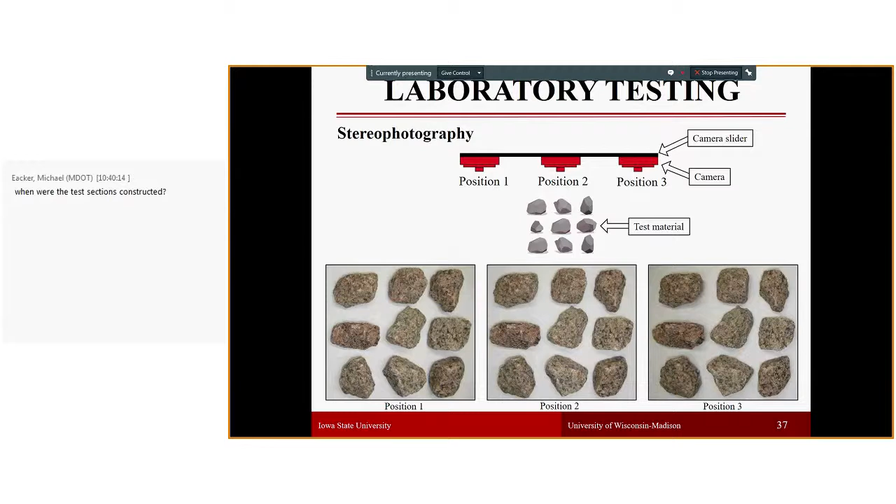On the imaging, what's the maximum size rock that you could image with your techniques? Probably the size limit for the 3D scanner won't go beyond 6 inches, John—maybe 6 to 8 inches. For the 3D scanner, that's the limitation, but for stereo photography, we can go with whatever size we want, because for the stereo photography analysis, you just need to take pictures of the rock from the top and from another angle. So there's no limitation in terms of the size we'd have to use.

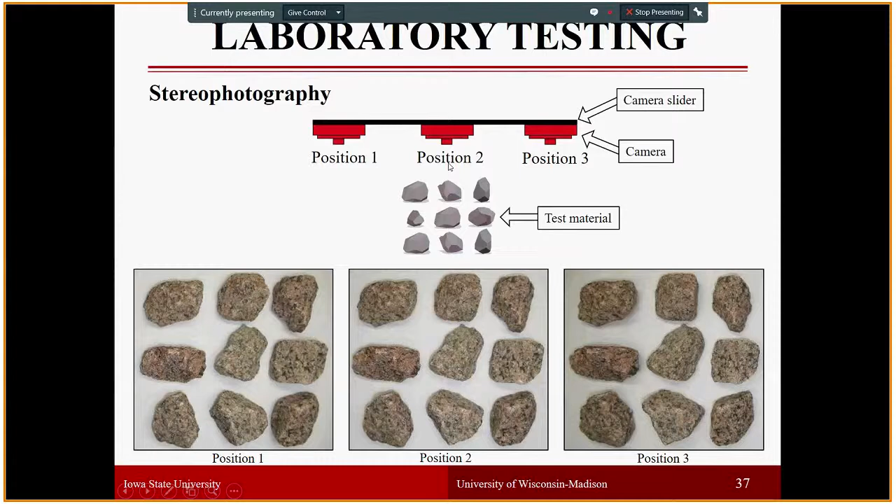We have a question online asking when the test sections were constructed. In August 2017, if I'm not mistaken—John, Dave, please feel free to chip in—but my understanding is it was built in summer 2017. Correct, yes.

Well, what did they shoot that through—was the asphalt on when they did this imaging? I think the question is a follow-up about the imaging—if you can speak louder. Did you do the stereo photography through the asphalt? Can you do it through the asphalt?

No, we didn't do that through the asphalt. Can it be done through the asphalt? No, no, we did not. We just started doing the stereo photography recently, in the last few months. We didn't do any imaging during the construction process at all. Did I understand the question right?

Yes, okay. We have another question online: now that it's been out there a couple of years, do you have any early performance observations—distresses, rutting, etc.? Not that we're aware of.